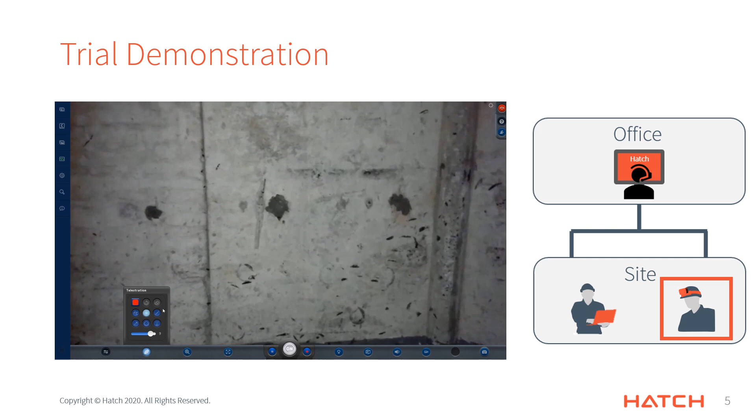Yeah, so I'm starting on you. I'll quickly go back and show me in the office, just so everyone can see me supervising. Okay, I'll go back to you. All right, so you had mentioned that there were some defects in this wall on the left. Let's take a look at that. I'll swap over to your hard hat camera so I can look at it for myself as well. Okay, and I'll turn on the light so I get a good view of it. Okay, yeah, I see those defects there, but it looks like there's another defect down here on the right side. Do you want to get a little bit closer to that so I can get a better look? Also just confirm that we're on 720. Okay, yeah, so it looks like there is a bit of delamination. I'll take a photo of that just for our records.

I'll share that photo with you. Yep, you can definitely see a bit of delamination there. You can see the rebar underneath.

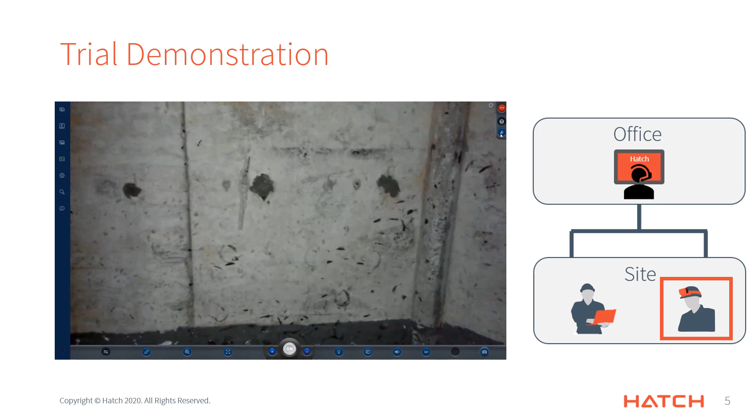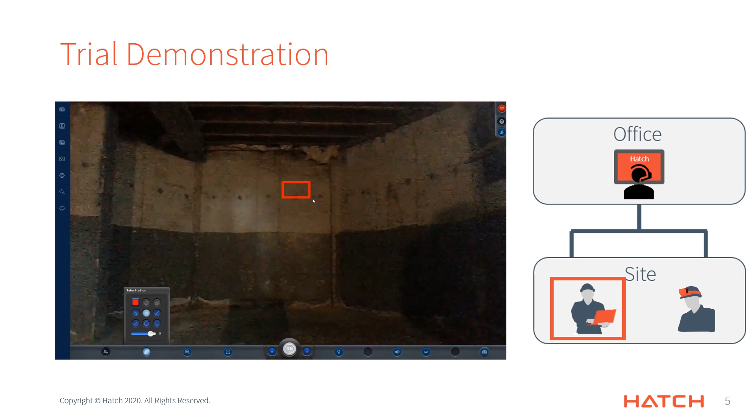Okay, great. I'll go back to the tablet view just so I can get a good view of the workspace. But let's measure the distance between these standard defects, like the rebar that's poking through up there. If you just want to pull up a tape measure, we can go take a look at those. Get back into your hard hat camera.

I'll turn the light on. Okay, yep, got a good view of that. I'll take a picture so we have that value recorded.

I'll share that with you so you can see it as well. Yeah, it looks like it's about a foot in between those defects in the concrete.

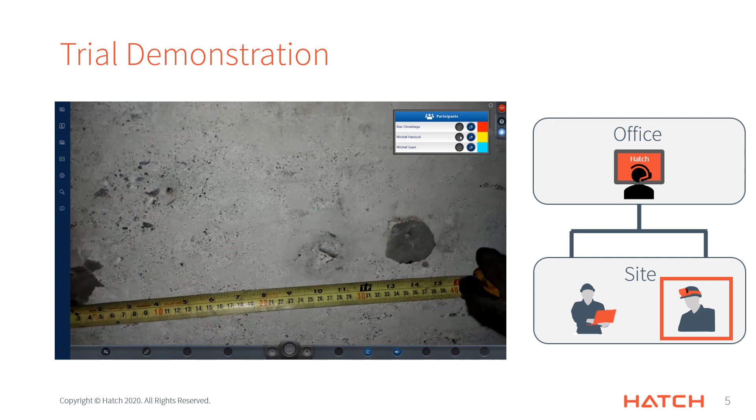Okay, great. And then I'll go back to the overall view just so I get a bit of an understanding of the space before we go into your thermal camera. You mentioned that you'd seen some thermal anomalies in the workspace.

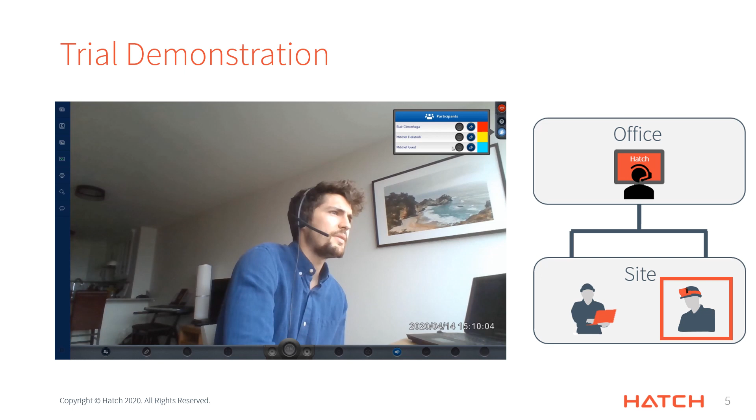So I'll swap back into your hard hat camera. I'll enable the thermal camera. I'll put on the Fusion view, that's the thermal view and the pictorial view overlaid. So I can see your computer is quite warm.

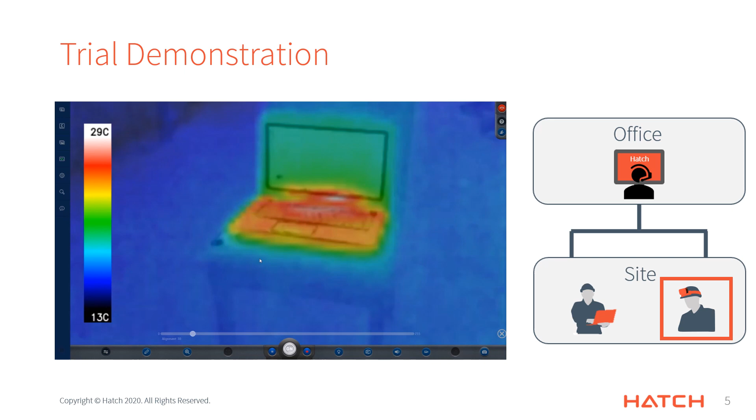But let's go take a look at that thermal anomaly you had mentioned on that left wall. Okay, I can see what you're talking about. It looks like quite a bit of heat is coming down through the joists.

I'll take a photo of that again just for our records. I'll share that with you so you can get an idea of the temperatures. If you can see from the legend, it's pretty hot up there, up to 30 degrees.

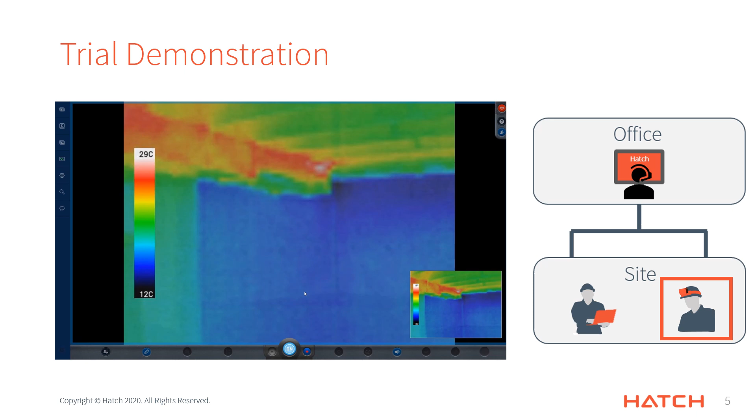Awesome, all right, I think that's everything we wanted to see. Transition back to the general camera again. Do you want to give us a thumbs up? Good work.

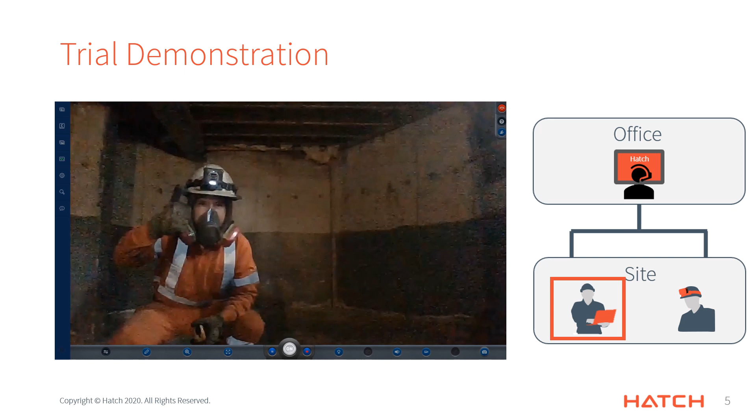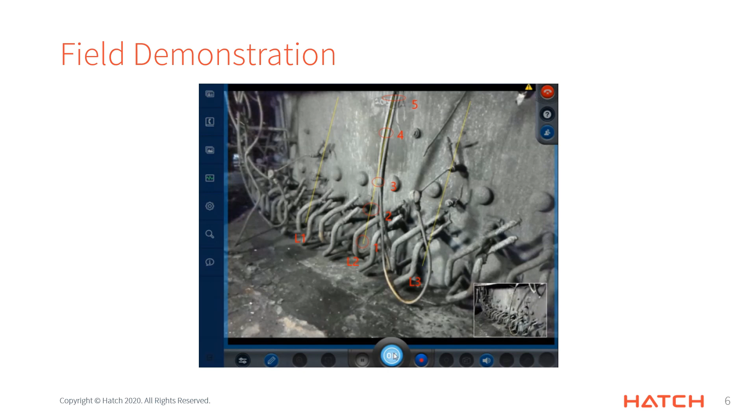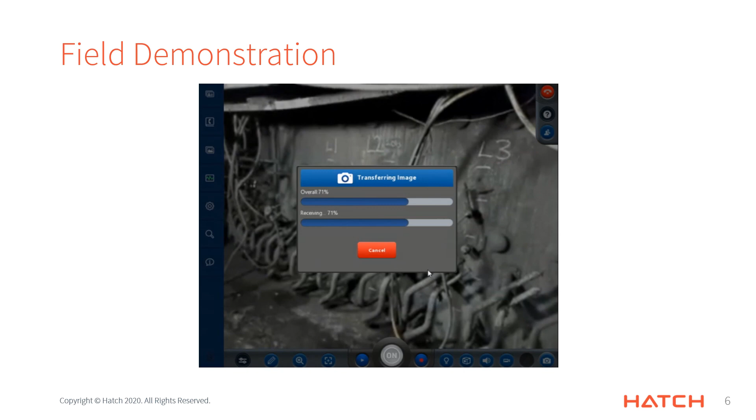Here is a recording from a recent remote inspection. To start, a photo was taken from the hard hat mounted camera of the personnel on site and then annotated with the locations of where measurements were to be taken. As can be seen on the bottom right, the worker transferred the markings to the sidewall while I was able to supervise. Once transferred, I was able to review and direct the worker to add additional identification to each of the lines, which would be useful later in the inspection for coordination. As this was completed, I was able to provide a final review, take a high-resolution photo, and transfer it back to the office. The photo taken is shown here on the right.

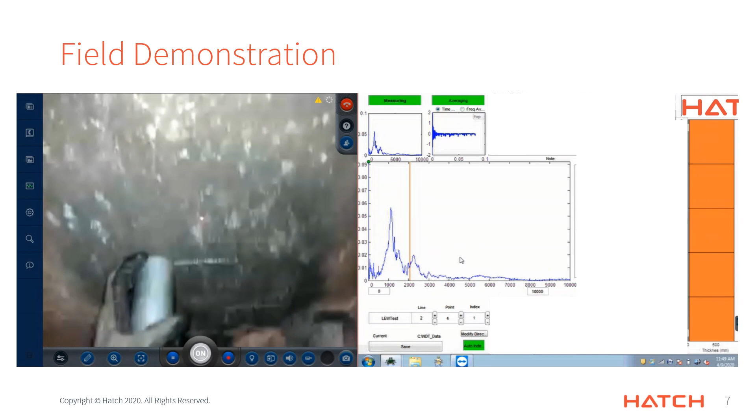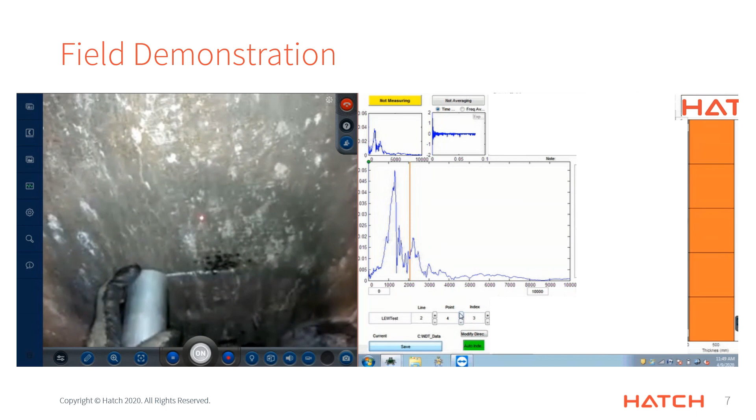Here is a recording of one of the acoustic measurements being completed. On the left is the video feed, and on the right is the data acquisition system, which is being remotely controlled. Using these two systems, I was able to supervise the signal generation process, i.e. impacting the furnace with a hammer, as well as capture the data produced. While there is no replacement for sending personnel to site, the move to remote monitoring has allowed our group to continue to provide the crucial services our clients depend on without the ability to travel.

With so much uncertainty around the status of site visits during this current pandemic, it is important to keep in mind that there are alternatives to physically being on site. The use of remote inspection and monitoring systems demonstrated in this video is just one way that technology can help keep projects running during these trying times.